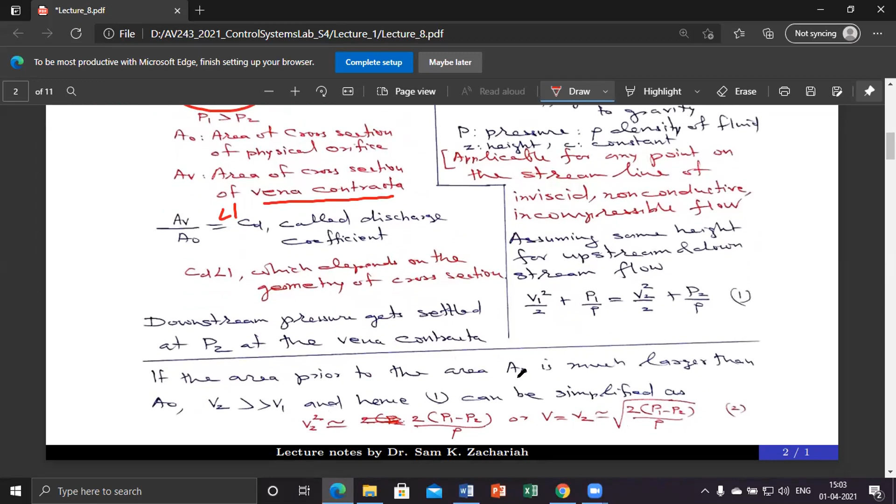And one more assumption: if the area prior to the area A0 is much larger than A0 - this is the area prior to A0 - if this is much larger than A0, then V2 is much greater than V1. You can understand it, here it's very wide.

For example, if you see during rainy seasons, various sewage portions and all, or riverside etc., you see the flow rate across the river may be very small. But when the water is passing through a small canal, then only that flow rate will be visible. The reason is that the volumetric displacement of the fluid is the same across different area cross sections, but whatever fluid is flowing per second crossing this area is the same as the fluid crossing per second crossing this area, but this area is very small.

That means the volumetric displacement should be the same, and volumetric displacement is nothing but linear velocity multiplied by the area of cross section. So if area of cross section is small, linear velocity will be large. Hence the velocity ratio will be inversely proportional to the area ratio, and hence you can say that V2 will be much, much greater than V1.

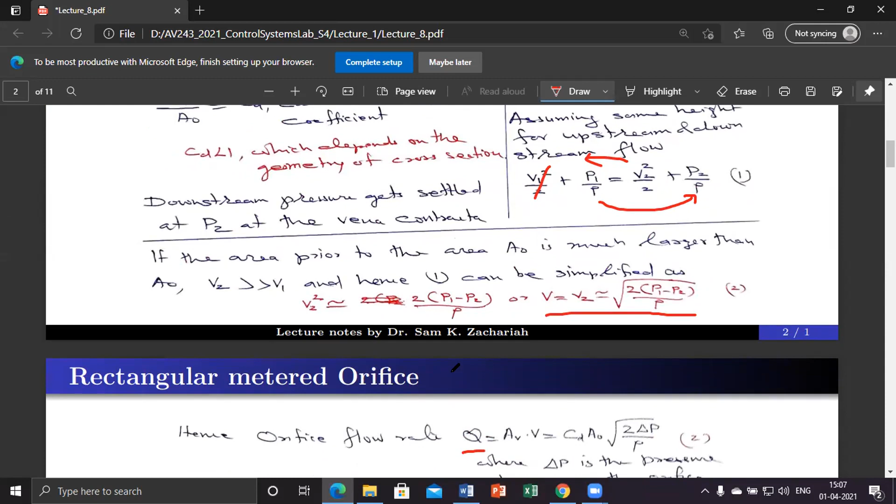If you see, any doubt? I have doubt, yes sir. Please. In the second time we use the Bernoulli equation for the point at which there is a vena contracta. So the pressure which we should use at that point should be the pressure due to that small volume, I guess. So why are we taking P2 instead?

Because P2 is the pressure much farther than the vena contracta, versus the pressure at the outward end of the pipe. I had defined vena contracta itself in such a way that beyond vena contracta, there is no drop in pressure. Even though I have written P2 here, you can write P2 right at the vena contracta. Beyond that, there is no pressure reduction, same pressure. That's why the flow is distributing like this. Till vena contracta only, pressure drop is there. So P2 is applicable from vena contracta onwards, downstream.

So if I consider a cross section of that second region which passes through the vena contracta, then I can say that at each point on the cross section the pressure remains the same. For this cross section you are telling? Here there is no difference. Beyond that, that's what it is. Actually, the pressure here, everywhere it is same. The flow is, that is why it is distributing like this. There is no difference.

In the vena contracta, actually it is radially going out and filling the total downstream area. So up and down there is no problem. But till the time here, from up to that, the flow is coming and then dispersing.

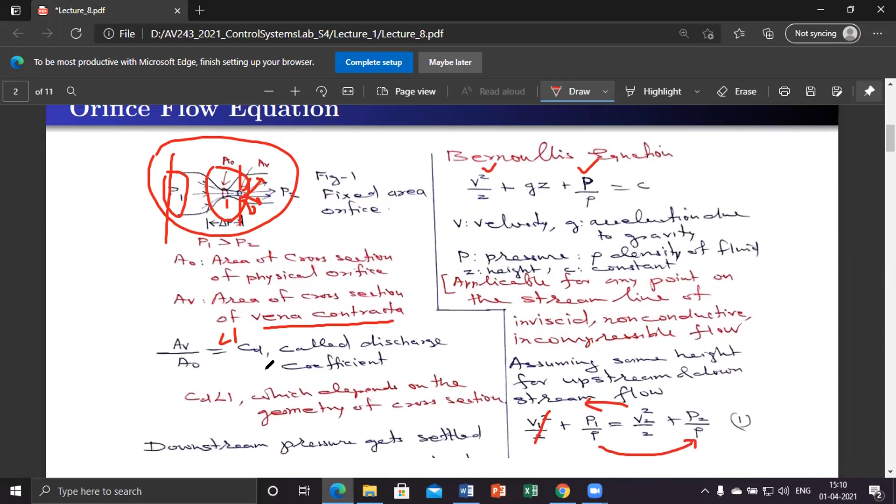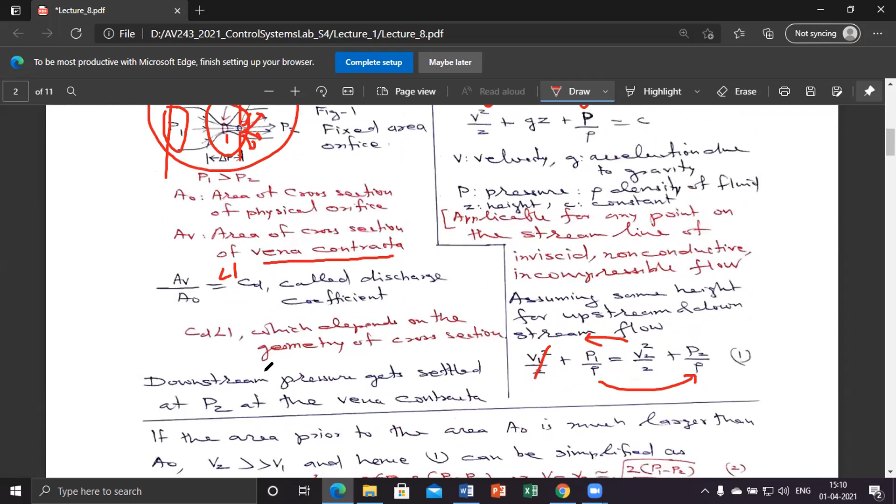Okay, okay sir. So fluid is actually more tricky. We have to make use of a lot of empirical relationships, and empirical relationships we get through CFD techniques on the actual geometry. And this will be valid for certain pressure ranges.

That's why there comes the so-called Reynolds number. So for different value ranges of Reynolds number, you will get different flow equations. If the Reynolds number is very small, you will get laminar flow, there the viscosity effect will dominate. When you increase the pressure difference, you will get inertially dominated flow, there the viscosity effect will be negligible.

Here, why we go for orifice flow is very important. If you go for laminar flow, one basic advantage is there won't be any square root relationship. You might have studied some equations called Poiseuille's equations, where the laminar flow is proportional to the pressure difference. It is not proportional to the square root of delta P; flow is proportional to delta P. Then you may think that would have been a better mechanism to mechanize controlled flow. Am I right? Why unnecessarily introduce a nonlinearity of square root?

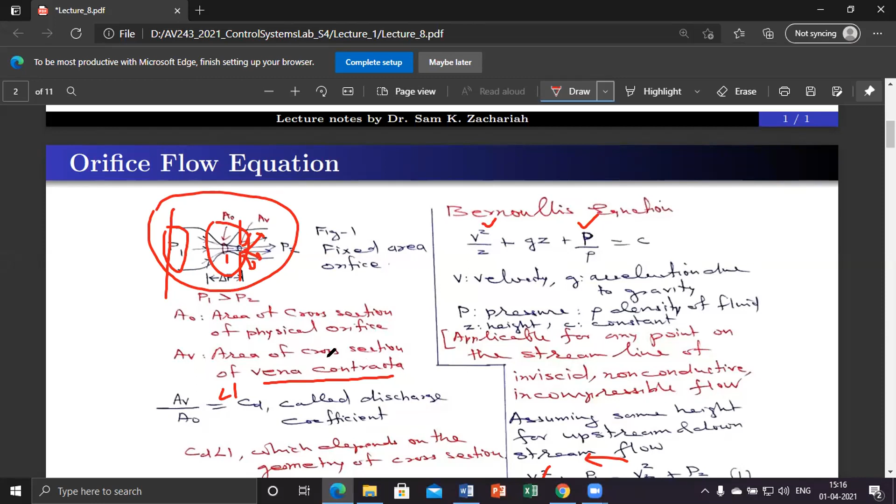Here, the operating pressures of the actuators are quite large, so that the effect of viscous forces on flow rate is quite insignificant compared to the inertial effects. This is basically due to the inertial effect. You can see that the potential energy due to pressure is converted into kinetic energy, and density is there. So this mechanism makes use of the inertial flow. At these pressure levels, the viscosity effects are quite insignificant because we are talking about a large pressure range. That is why I told you we are operating in another domain with respect to Reynolds number, so that you can almost neglect the effect of laminar flow or viscosity effects. Viscosity is there, but it is quite insignificant compared to the driving force.

Now let me concentrate on how you can mechanize it. Consider this equation. What are the variables here? Our entire purpose is to change the flow rate. Here Q we have to modulate depending on our requirement, because this should be a controlled flow which has to be injected into an actuator. Is there any element which is in our hand so that you can change it and control this?

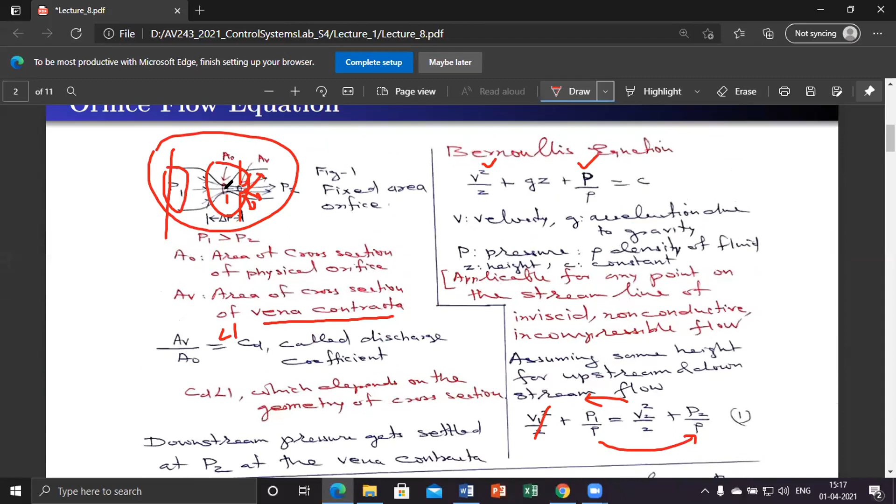CD, the discharge coefficient, is a constant of the physical opening. A naught is the area of the restricted orifice, that is also fixed. Delta P is not the controlled quantity, it is the effect of flow, and rho is the density. So here there is nothing variable, but there is one mechanical parameter which can be made variable through appropriate design of the orifice. A naught is a fixed area orifice, but if we can make it a variable area orifice, then we are done. That is the mechanism here.

One doubt, can you once again explain why can't we vary the delta P? Now I am coming to the point.

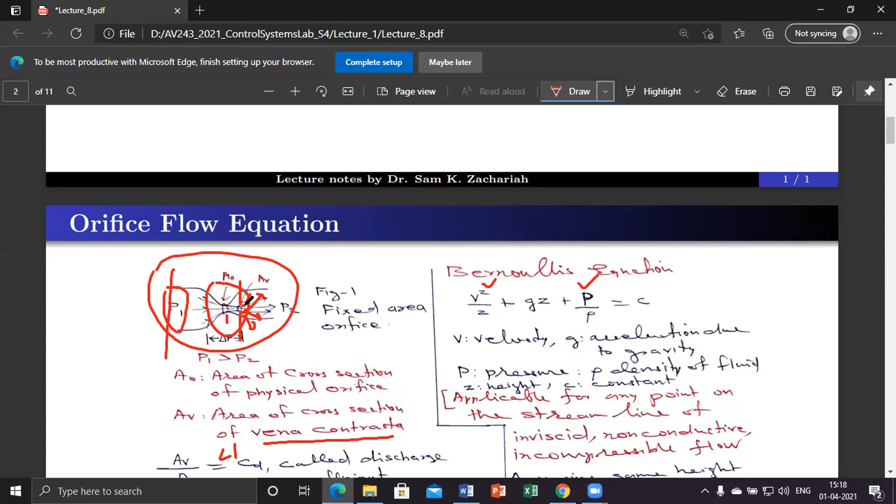Delta P is due to something called reaction. For example, delta P contains two components, one is P1 here, another is P2 here. The P2 component is the effect of flow here, it is an effect. Even though P1 is in our hand, P2 is not in our hand, it is the effect of the flow rate, not a cause. Because of that, we cannot modulate delta P as it is. P1, if we can modulate, let us do it. But normally P1 is a constant pressure head supplied by a pressure source, so we will not modulate that either. Then if you want to modulate P1, we have to think about some other mechanism. The basic idea of a flow control valve is there is a constant hydraulic pressure head, like our VCC in an electronic circuit, a supply DC voltage, and how you can change some resistive path to change the current. That is the question here. Similarly, we are having a DC source pressure, and we need to change some resistance of the path so that the flow rate can be changed.

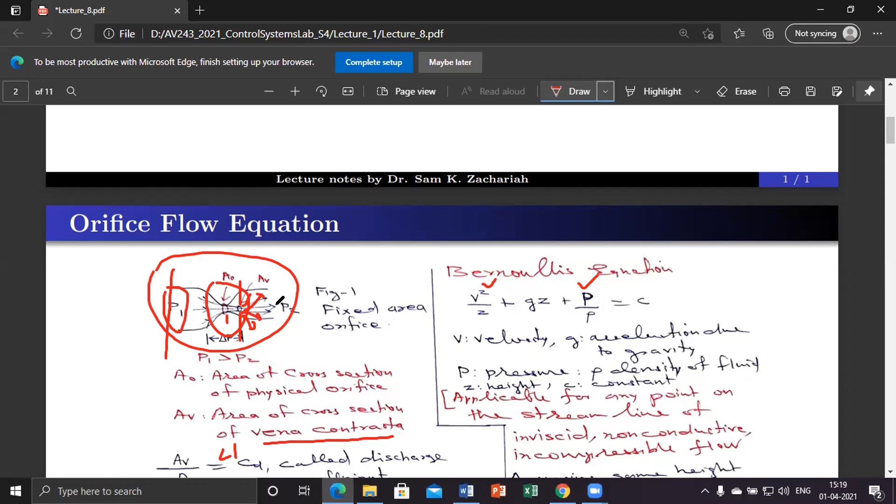And P2 is corresponding to something like the voltage drop in the downstream. That is an effect.

So what we are going to do is, A naught, we are going to make it as a rectangular orifice, and we are going to find a mechanism, a simple mechanism by means of which one parameter of the area, the width of the port, we can change.

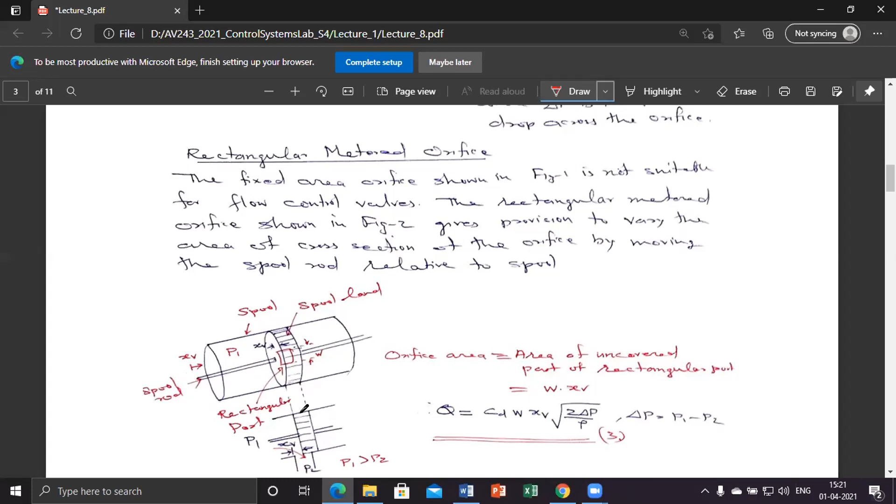Now some more parameters: the displacement of the spool land with respect to its neutral position. And what is neutral position? Neutral position is the position where this is exactly closing.

Now we assume that the port width, this is the port width, is same as the land width. This is the spool land width and spool port width, both are same. So if the port is exactly closed by the spool land, that position we call XV equals 0.

This is the reference position. The moment you push the spool rod, some portion of the rectangular port will get open. And if you connect a fluid pressure source here with a pressure of P1, what will happen? The fluid will come out through this rectangular small port and escape.

Assume that we are connecting some sort of pipe also here. I have shown here a cross-section diagram, same cross-section. I have moved this spool land by displacement XV, and whatever the opening from this rectangular port connects to a pipe, and the downstream pressure is nothing but the pressure P2 here.

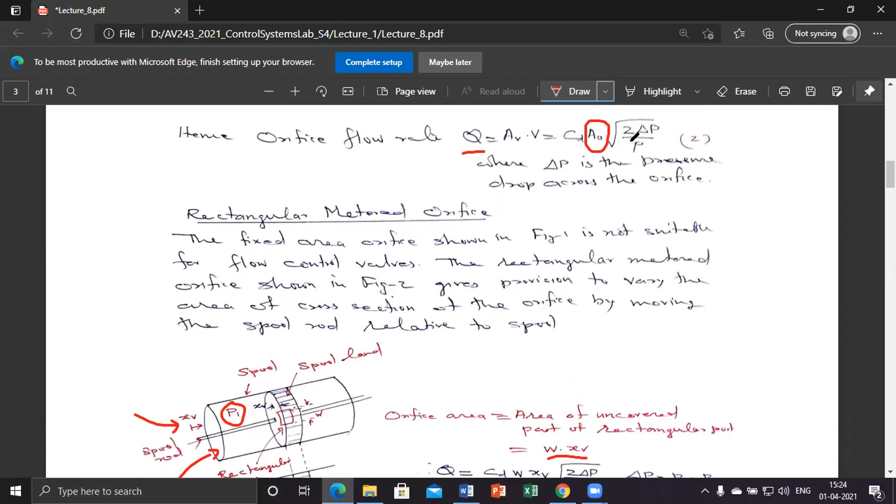Now we are ready to apply the previous formula: CD A naught square root of 2 delta P by rho. Instead of A naught, we will substitute W times XV. So CD times W times XV, into square root of 2 delta P by rho. And hence Q, the flow rate through the spool valve, is equal to CD, W, XV, and the square root term with delta P.

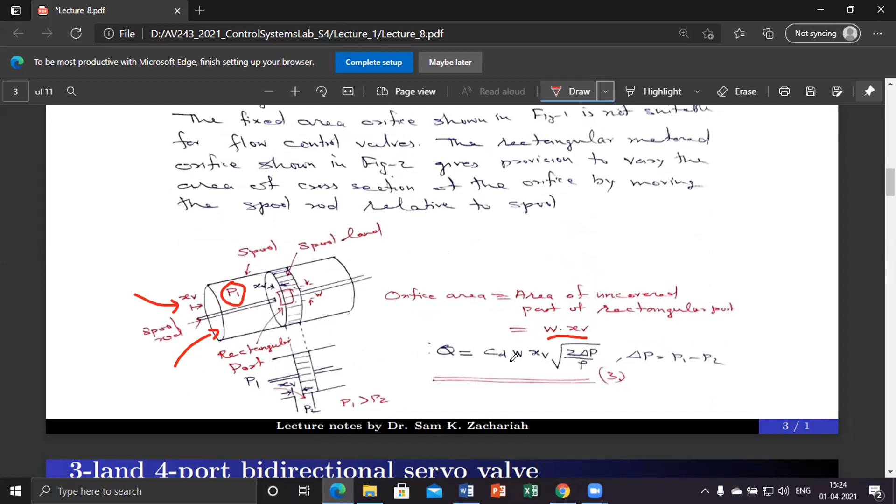Okay, is this particular concept clear? Yes sir. Okay, the diagram is a bit difficult to visualize.

If you could show some picture or a little model. This is what the problem is. This is a cylinder. If you see the cross section here, what I am doing is taking a cross section at this point. If you take a cut cross section here, what you will see is this one only.

Because you are electronics engineers, there's a little bit of difficulty there. Sir, you mean to tell that W is like measuring into the paper, the value of W, like in the second diagram where we show a cross section. XV is shown as parallel to the screen, and W you mean that it is going into the screen, right?

Yeah, W is the length of this port along the surface of the cylinder. This one, this much. I will mark it here. Say here, I will mark this much. This is the width W.

Yes sir. So if we just interpret it in the second figure that you have shown, the cross section, it's like it's going into the page. Ah, that's correct. W, into the page. Okay sir, okay.

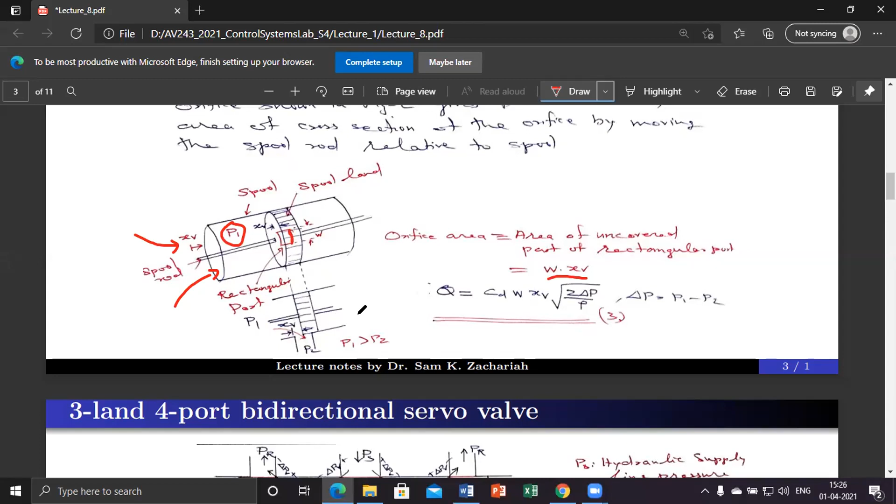If you understood this, now I am adding some more complexity. Here, the only problem is the flow is having only one direction. We are applying a large pressure here and a small pressure here, and the flow rate is only one direction. But normally for actuators, we should have control over a bidirectional flow.

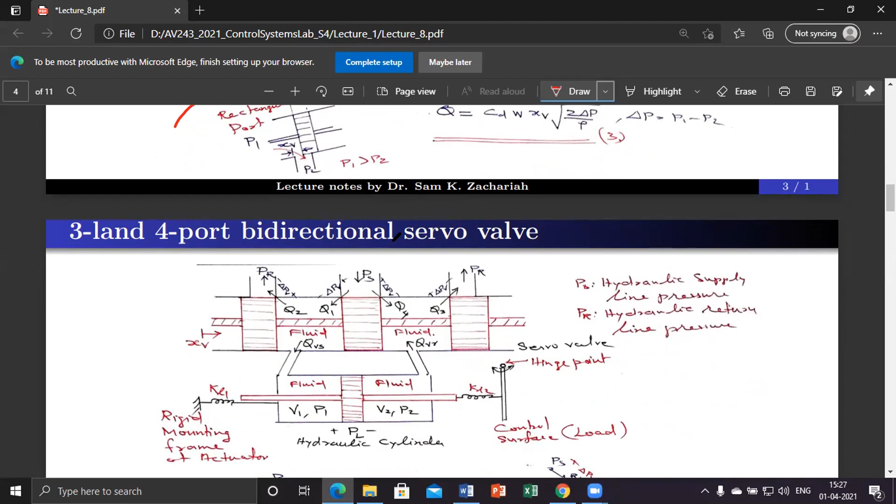Hence, more than one such ports we are going to put in cascade, in tandem, so that we get a single spool driven but multiple ports simultaneously opening and closing, so that we can mechanize it into a bidirectional valve, and such a valve is called a servo valve. The servo is normally associated with a bidirectional position control system that requires bidirectional flow control. So it's the basic name. Instead of a spool valve, we are converting it into a servo valve, and it is bidirectional.

This will have 3 lands and 4 ports. 3 land means this is the first land, this is the second land, this is the third land. This is port number 1, this is port number 2, this is port number 3, and this is port number 4. I have accordingly marked Q1, Q2, Q3 and Q4. All the lands are connected on a single spool rod and they move simultaneously.

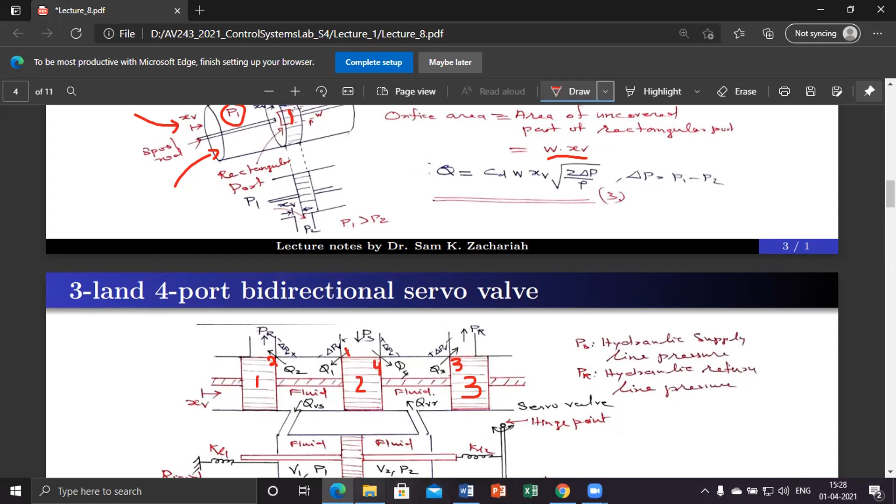I will show how this acts to control a bidirectional motion of an actuator. That's why I connected a hydraulic actuator also along with this. You can see this actuator. This actuator is very simple when you come to electro-hydraulic systems. Unlike your motor, there are multiple permanent magnets, coils, windings - it's a very complex mechanism. We have to sense the location of the permanent magnet with respect to the coils, then we have to switch the direction of current, etc.

But here it is very easy. This is a simple cylinder piston. This is a cylinder and this is a piston, and the piston rod is passing through this. The body of the cylinder is attached to some rigid frame.

Suppose we are connecting it to actuate the control surface of an aircraft. You might have seen, while the aircraft is flying, some actuators deflecting the aileron control surface. Then the actuator will have 2 parts: one is its reference, another is the moving end. In that sense, if you consider this as a hydraulic actuator, its moving end is connected to the piston, and the cylinder is supposed to be the reference, and the cylinder is connected to the aircraft body. This represents the aircraft body or fuselage through some flexibility. Everywhere some flexibility is there.

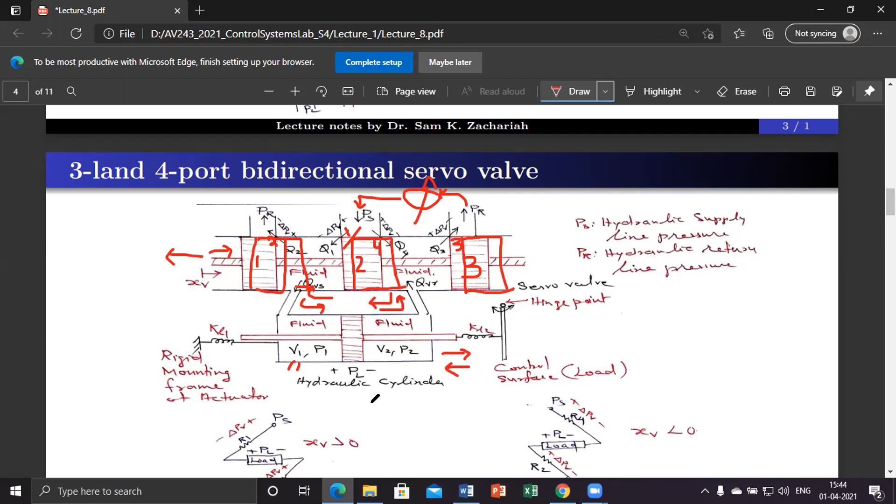Another thing: nowadays, for legged robots, there's importance in using regenerative actuators. That is, we want to store the impact energy and then retrieve it back. This sort of mechanism is very good for controlled storage of impact energy, so if you study it well, it will not be a waste. It is now being used in advanced robotics as well as high power, high velocity systems. For high velocity or high acceleration systems, the inertia of the moving element should be much smaller, which is guaranteed in hydraulic systems, unlike electromechanical motor-based systems.

I hope you understood. Yeah okay sir. Okay, you will not understand fully—you will understand only after we do the complete simulation and modeling of this actuation system. Then you will enjoy it. Then you can come back and compare electromechanical versus electro-hydraulic actuation systems.

Okay, now you are listening for more than 1 hour. I know it is difficult for you. So, because here again, some more complex material is coming, we will take it in the next class. I don't have any problem, but I feel you have a problem because of staring at the screen for quite a long time.

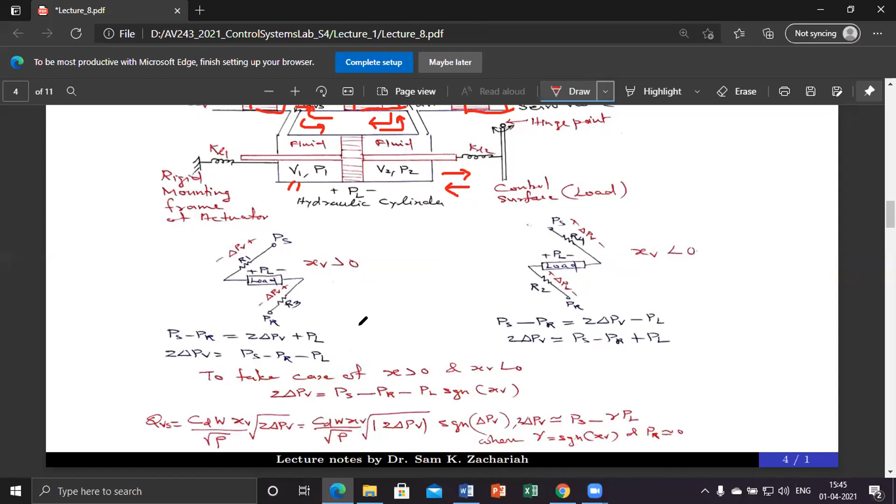Sir, I wanted to ask: is there always a steady flow through the actuator of the liquid? No, a steady flow is not required. For example, see, what is a servo system? We want to hold this control surface at a particular orientation. If you want to hold it, what will happen? You have to hold this only.

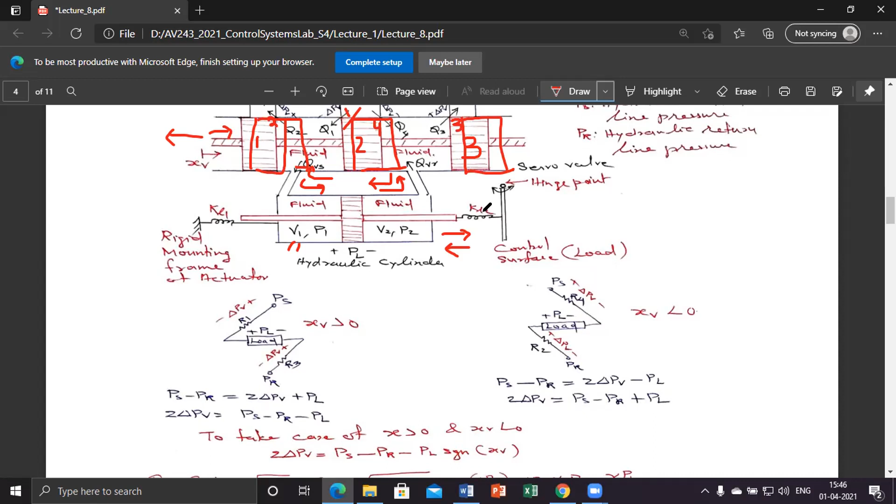For holding, we require only pressurized trapped fluid on both sides; there is no requirement for continuous flow coming in. So once you pressurize the forward chamber with sufficient flow, you can close the servo valve so that the fluid gets trapped, having a large pressure P1 and a small pressure P2, so that P1 minus P2 into the area of cross section of the piston gives a constant force. This is another benefit of the electro-hydraulic actuator, because for holding with a force, no power is required. What is power? Pressure into fluid flow rate is fluid power. For holding, no fluid flow is required, only pressure is required.

But consider the electromechanical case. For holding, we require torque, and torque is proportional to current. So to hold the load, you have to inject a large current through the motor coil, which leads to Joule heating, I squared R heat dissipation in the coils of the armature. In that sense, the hydraulic system is better if you want to hold it. But if you move it, that benefit is lost.

Sir, actually in the diagram you wrote V1, P1 and V2, P2, so I was thinking if there is always a steady flow of liquid through that. Okay, for explaining the diagram, I put it for a general case—I am not saying it is the steady state position, only a dynamic condition. So from a diagram point of view, it is correct, but there is no steady flow throughout the whole system. If you want to keep the load perfectly stationary, and if there are no leakages across different paths, then the flow through any path is zero.

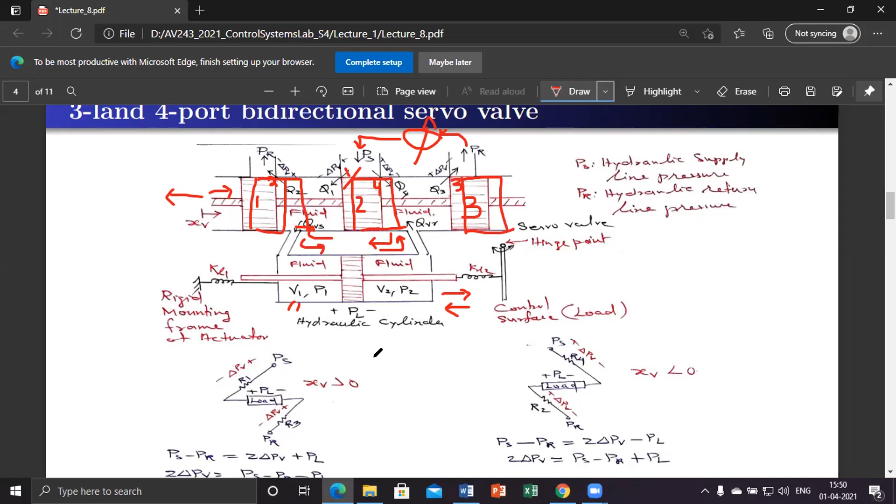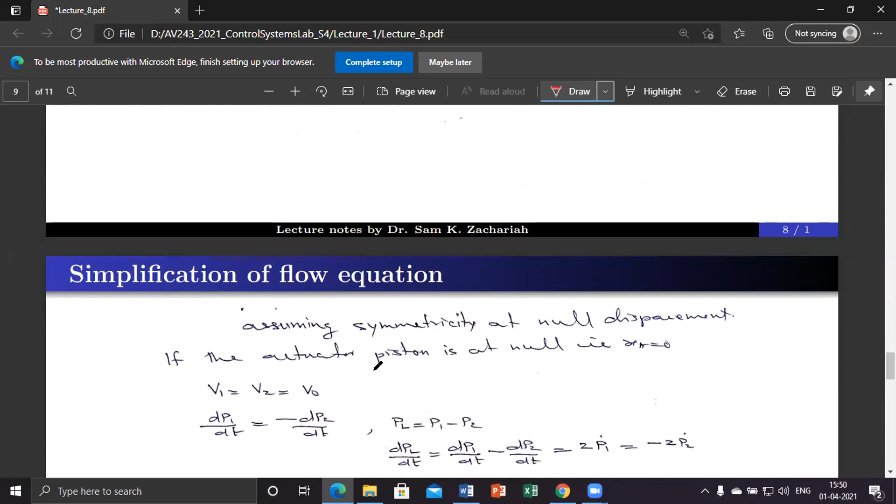But sir, that flow rate Q1 will not be constant. Flow rate is a direct requirement with respect to the velocity. What if the flow rate is not constant when there is no steady flow? Here, nothing is constant, everything is dynamic variables. So at what point of time are we talking about the flow rate related to XV, related to the displacement, to the velocity? Now you have to wait for some more. You can see downstream how many slides are there. As you come across all these things, all the dynamic equations are going to come.

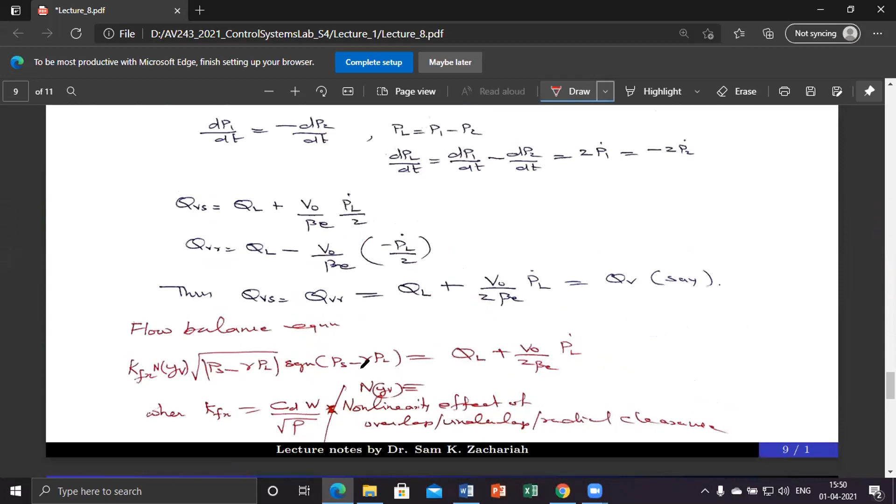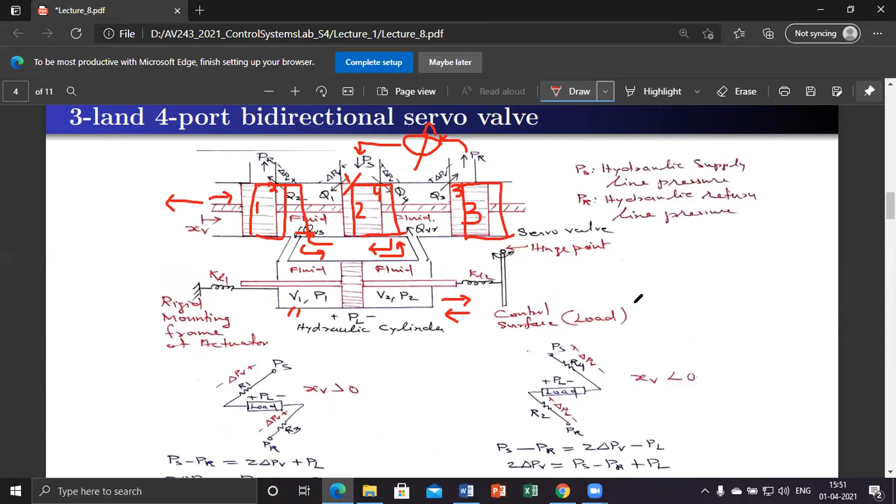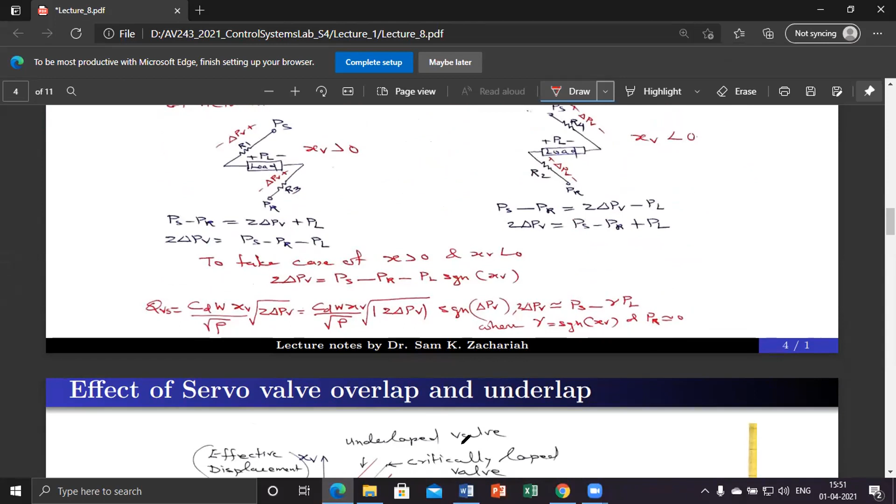So all your doubts will be clear only after I cover this entire portion. It is a complete dynamical system, and we are now deriving piecewise relationships of individual components. After that, we will assemble all such relationships together to form the total closed loop. Then only will the equations be complete and over. Till that time you have to wait. I will send you these lecture notes, you can go through them. Come prepared in the next class to ask more questions so that I can explain better.

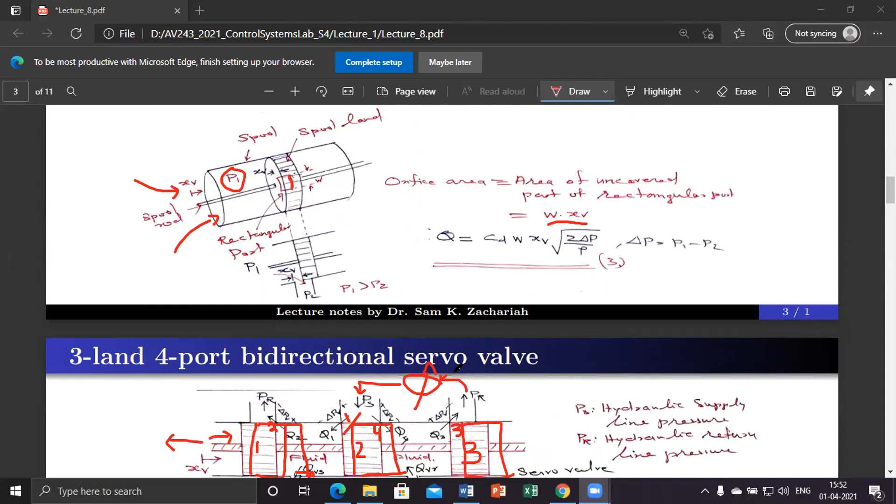So, from the previous lab, I'm saying. Sir, previous lab, oh okay. Yes sir, what's the doubt? Sir, in the step response, when we gave the command amplitude of 5%, when we tried to plot it for 100 seconds, we were getting a spike in between. So how can we explain it, sir?

This is using your static, that stick slip friction model, is it there? Yes, sir, friction model is there. Okay, so using the friction model only, a spike means a glitch sort of thing, a sudden glitch. No sir, a sharp spike was there. Yeah, sharp spike means, what's the amplitude here?

Normally what will happen is, if the friction model is not proper, this sort of behavior can occur. But the friction model we used is called the stick slip friction model. That means if you use some sort of integral control, this actuator will stick for a certain time, then suddenly slip, again it will stick. That is called the stick slip model. It will not be a spike in the motion, but a step change from one steady state to another steady state. If it is a spike, without seeing your model, I cannot say that. So you can probably send your result, then only I can comment.

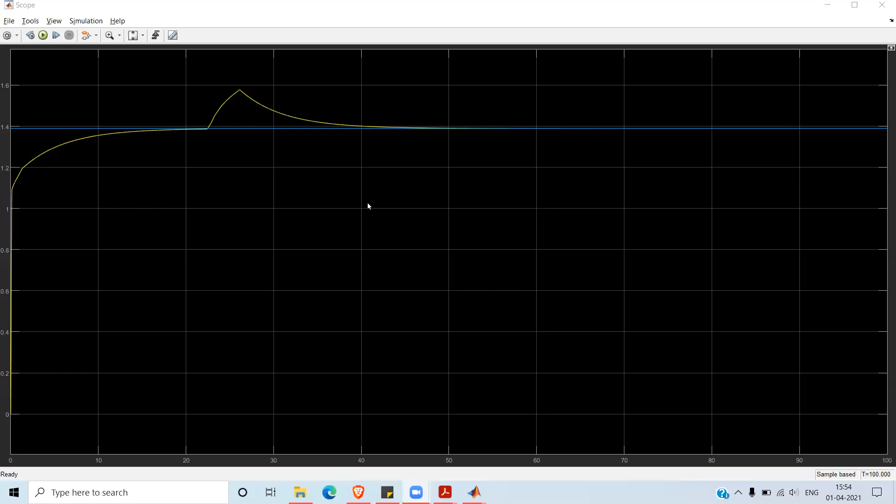Sir, this kind of spike is coming. Actually, this is not... This is for 5%, right? Yes sir. And you are using PI control? Integral control is there, yes sir. Is there, okay. So this is a phenomena if you use integral control, and what is really happening is the friction has a stick slip sort of behavior, I told you.

This was initially caught up within the stiction zone. After that, there was a small steady state error. That error gets integrated, and the control command will increase. When the control command increases, the motor torque will increase, and there is a point at which the motor torque will exceed the maximum stiction force. Then it will move. But while it moves, there will be a bit of over motion because of the integral control, which suddenly cannot correct it back. Then gradually it will be brought back. So this is a problem of using integral control along with a friction dominated system.

So what you can try is you remove your integral control and see if this is still happening.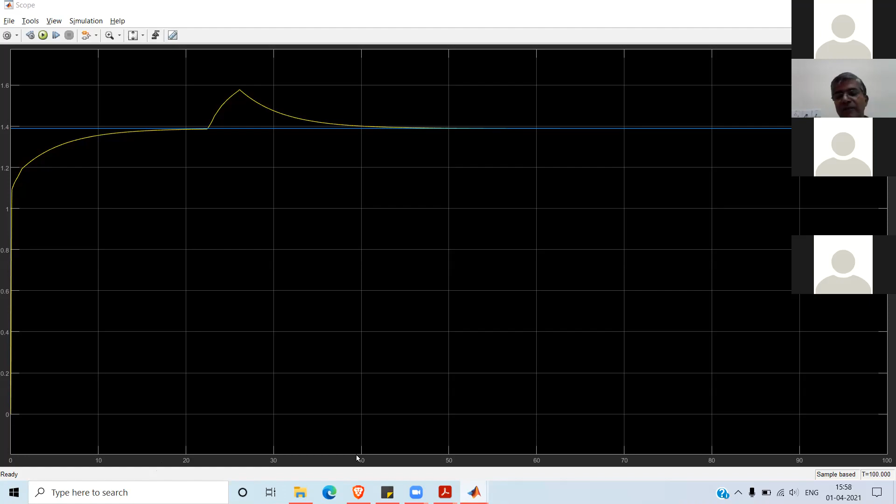You can play around. In order to troubleshoot this, you simply remove the friction and see that it is going, or you remove the integrator and see that it is going. Then with this, you can play around and understand why this is happening. And since you are writing the program in MATLAB, you have hold on each and every block, do it and understand it. All the states are in your hand.

There is a command called keyboard command. I hope all of you are familiar with the keyboard command in MATLAB. Are you using the keyboard command? No, sir. Then no should become yes. The keyboard spelling is the same as the normal keyboard spelling. You find the help by typing help keyboard. This is the command which is useful for troubleshooting, that is, at any line, if you simply type keyboard and execute,

the execution will come and stop there. Then all the parameters so far will be accessible to you. You can see the intermediate values, you can understand what is happening at that particular point, why an error message comes. So this is a very important thing for MATLAB programming. Whenever you want to see what is happening, and to understand on which line the problem is happening, you can keyboard multiple lines and understand up to what level it is working and beyond what level it is not working. Such things are also very important. You can simply type keyboard and exercise this with respect to this problem.